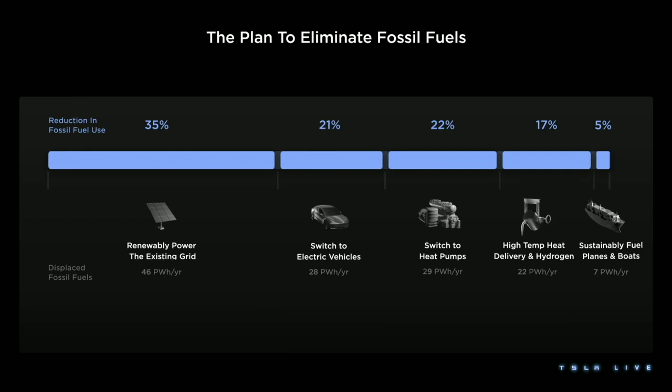Yeah, my personal opinion is that as we improve the energy density of batteries, you'll see all transportation go fully electric, with the exception of rockets. That's awkward. But you can make the fuel with CO2 and water. So you can make methane with CO2 and water, and in fact, you can do that with just electricity. Yes, exactly. In fact, on Mars, if we hopefully get there at some point, the atmosphere is CO2, and there's water ice throughout Mars. So you can take the CO2 and H2O and turn that into CH4, which is methane, and oxygen. So ultimately, even rockets can be electrified.

So first, repowering the existing grid with renewables. And this is going to be a consistent theme. You'll see our estimates for the number of terawatt hours, terawatts, and trillions of investment at the bottom of the page. This is already actively occurring in front of us. 60% of the generation added to the US grid was solar in 2022. And actually, on a year-on-year basis, solar deployment is growing 50% year-on-year.

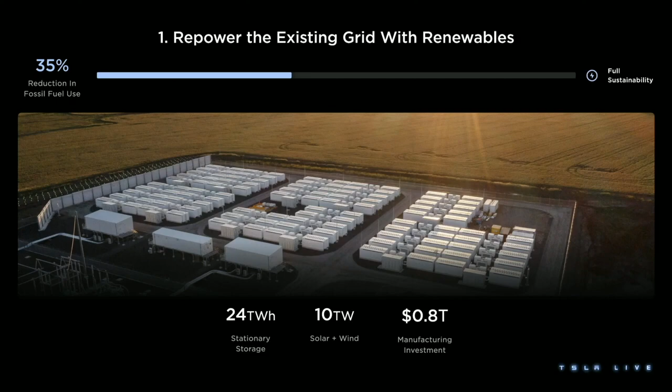Second, switching to electric vehicles. Again, 21% reduction in fossil fuel use by doing this alone. Obviously, Tesla is heavily engaged in this activity, along with many others. Overall, EV production grew 59% year-on-year in 2022, and EVs hit an amazing 10% market share. I mean, it's an awesome milestone. I'm super excited to see that. And you can see the sort of breakdown of the fleet by millions of vehicles. Our goal is to do 20 million electric vehicles a year.

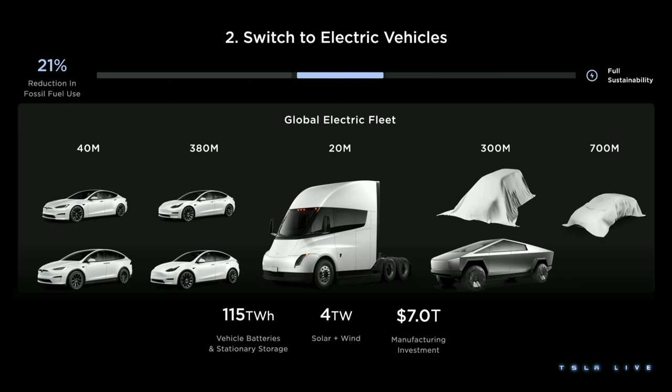Yeah. And one of the reasons why EVs are so enabling is this end-use efficiency point. Tesla Model 3, it's 4 times more efficient from the well to wheel than a Toyota Corolla. And that's all about the efficiency of getting the electricity into the car in a sustainable energy economy, and then how efficient the car is in transferring that stored energy to motion on the road.

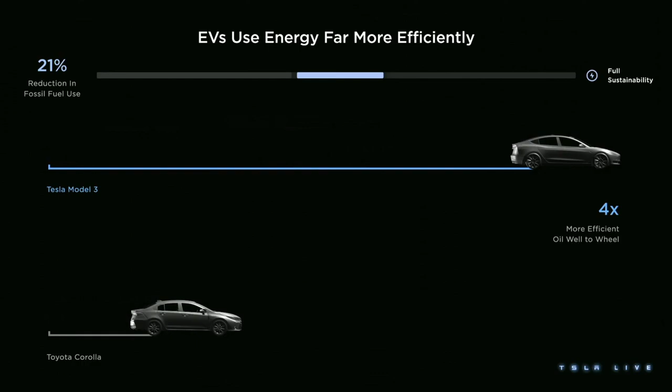Switching to heat pumps in homes, businesses, and industry. Right now heat pumps meet 10% of building heating needs. Install rates growing 10% year on year. It really needs to accelerate.

Heat pumps can serve heat applications up to 200 C in businesses and industry. And from an investment perspective, as you can see on this page, this is actually the lowest hanging fruit in terms of displacing fossil fuels. You might be saying, well, what exactly is a heat pump? So

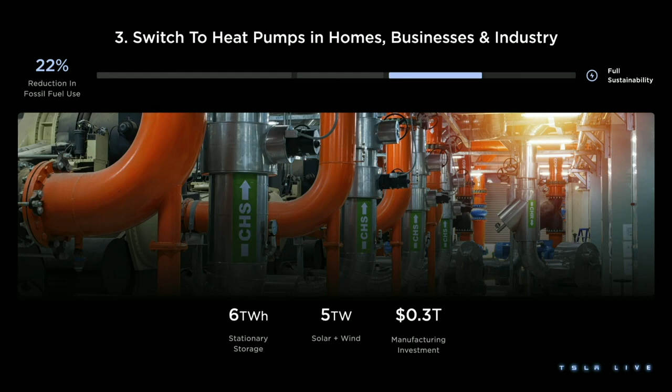heat pumps don't create heat, they move heat. When you think about the natural gas furnace in your house, it is generating heat itself, but what the heat pump is doing is actually moving heat from outside of your house into your house. They're just an air conditioner or a refrigerator in reverse.

So we're surrounded by heat pumps. They're all over this factory. They're in your house. And all this really is about bringing them to displace all the fossil fuel heating in all of the homes, business, and industry.

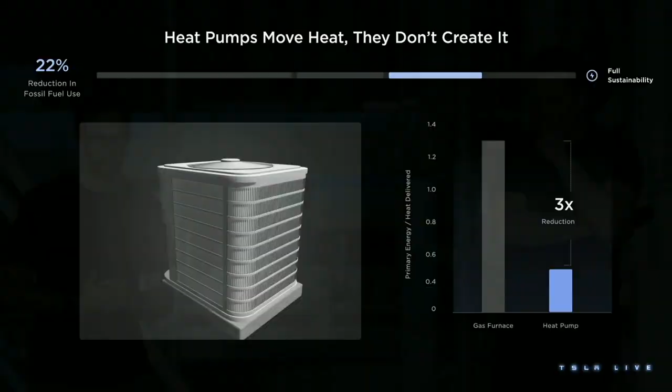Next, a little bit more detail on electrifying high-temp industrial chemical processes. So over 50% of industrial heat is greater than 400 C. Cement, steel, fertilizers, chemicals, plastics, metals refining all need like 1500 C. So we need a solution here. Ultimately, it's purpose-built equipment that enables electrification. Carbon graphite is stable up to 2800 C. There's other options in the 1500 C range, like silicon carbide, other materials.

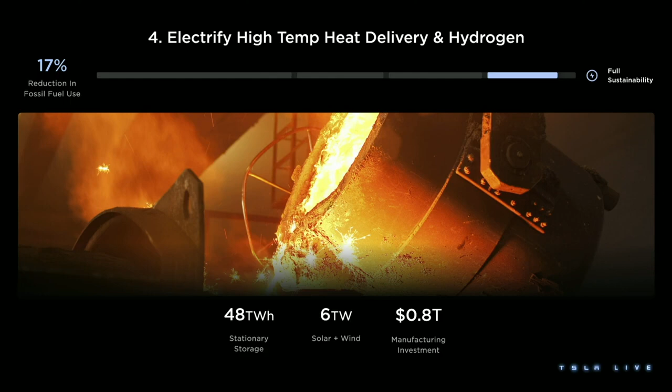So the idea here is you create and store heat when renewable power is available. If this is a sustainable energy economy, renewable energy is intermittent. Peak of the day, you've got more generation than you need. You make a bunch of heat then, and then you transfer that heat into the industrial process 24 hours a day using the stored heat you created when the sun was shining or the wind was blowing.

That's the concept here. And then on the hydrogen side, we also need green hydrogen to decarbonize metals and chemical refining processes. This is things like ammonia, making steel. There's roughly 120 million tons of hydrogen sourced from fossil fuel today to do these things. And hydrogen can also directly replace coal, which is currently used in a ton of steel production, through a process called directly reducing iron. You can replace blast furnaces with a hydrogen-reducing direct reduced iron furnace. And this is the way to eliminate fossil fuels from these aspects of the economy.

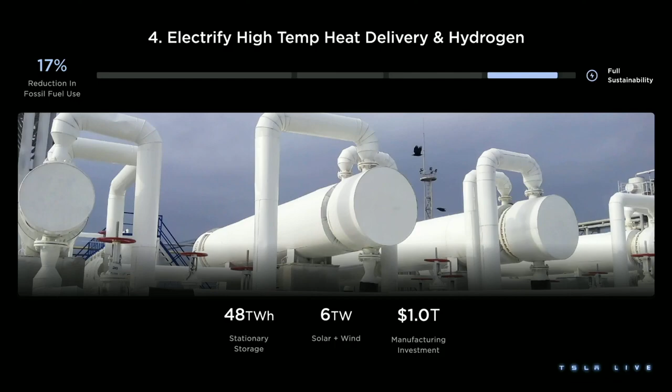A small part of the pie, but a necessary part of the pie, is sustainably fueling planes and boats. Shipping accounts for 3% of global CO2. It's ripe for electrification. Even with lithium iron phosphate, long-haul ships can be fully battery-powered. So that's a great opportunity to electrify. Energy density is a little bit harder for planes, but short-haul is doable today. With some improvements, we'll get long-haul underway. But even in the meantime, we can leverage sustainable aviation fuels produced and stored using excess renewable electricity. There's a lot of work going on in this space.

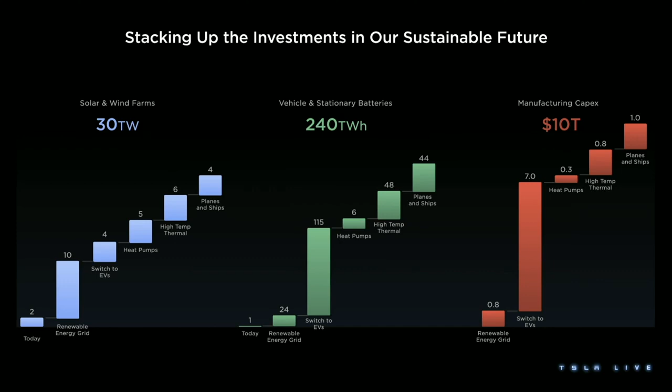So when we stack up all of these efforts, we end up with the numbers we shared at the beginning of the presentation: 30 terawatts, 240 terawatt hours, $10 trillion. And you may be saying, I need some context. Is this feasible? Spoiler alert, it's entirely feasible. Just looking at it from a growth rate perspective, how much do we need to grow the deployment of these technologies? We're talking about only a 3x growth rate in solar and wind deployment. Solar is already growing at a breakneck pace, as is wind. This gap is going to be closed really quickly.

When we look at the electric vehicles, they have to grow 11x. Well, they grew 60% year on year last year. That gap is going to close pretty quickly as well. And lastly, storage. Tesla's energy storage business has grown at 65% CAGR since 2016. The global energy storage business is accelerating pace as well. I mean, all these gaps are going to close, especially as this momentum of the transition to sustainable energy accelerates.

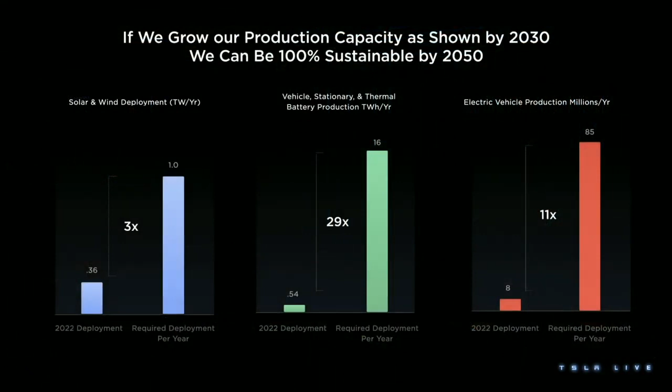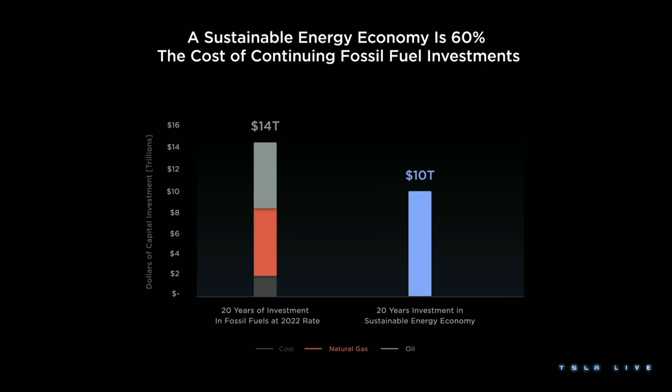And then, what about this investment? How do I have a reference point on this investment? Elon mentioned it's 10% of one year's world GDP. Another way of thinking about it is how does it compare to what we invested last year in the fossil fuel infrastructure? And it's 60% of that investment. So actually, building this sustainable energy economy is less than extending the fossil fuel economy on a year-over-year investment basis. So very doable.

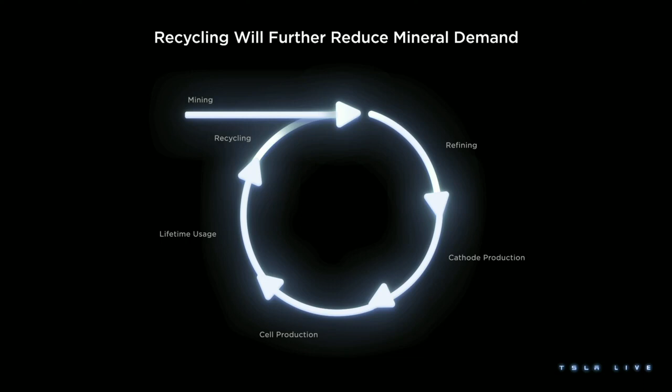We're doing this to build this sustainable energy economy, but the maintenance amount of ore that we require is really an order of magnitude or more less, because of recycling.

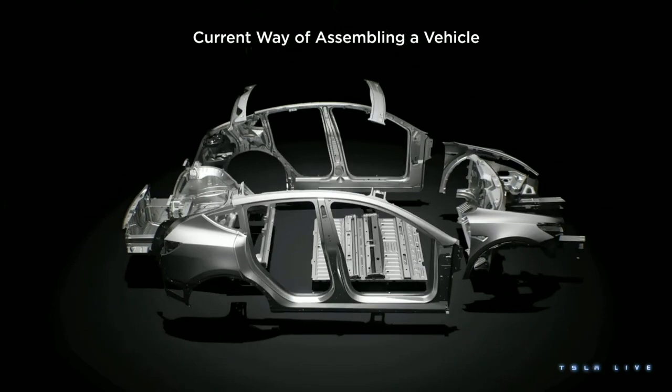You take all these stamp panels, you put them together, then you put them in a framing station, you build a body that looks something like a car, you put the doors on, and then you paint them. Once you get the color, you take the doors off, and then you start putting the interior inside the car. It comes in through the openings that already exist.

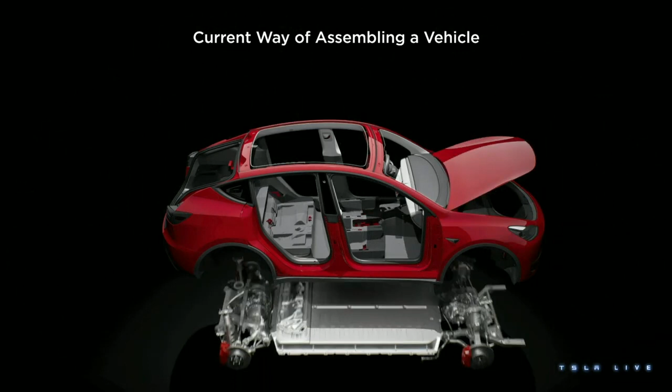I wish it went in like this big piece like this, but there's actually people coming in and out of the car. There's awkward movements. Then we lift the car up. We put stuff from underneath it. We put it down. Then we put the seats in the car. And finally, we close it all out with glass, and we bring those doors that went away for a trip, and we put them back in the car.

Most of the time, we're doing this with a big, giant car and moving it and doing really nothing to it at all. As part of the master plan, we have to make another step change in cost. We started this on Model Y when we made these huge gigacastings, and we deleted hundreds of parts. We simplified assembly with the Model Y structural battery, where we decided the floor should be a part of the car. The battery is the floor.

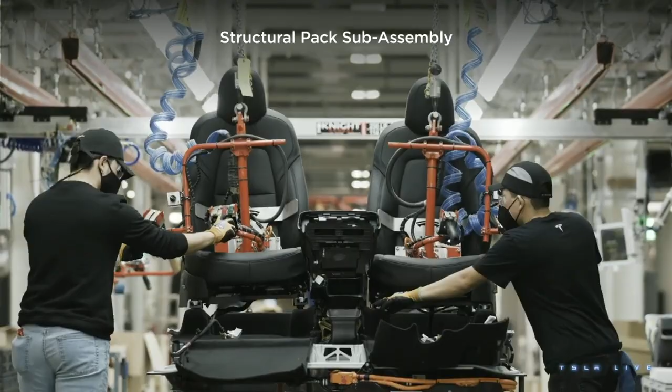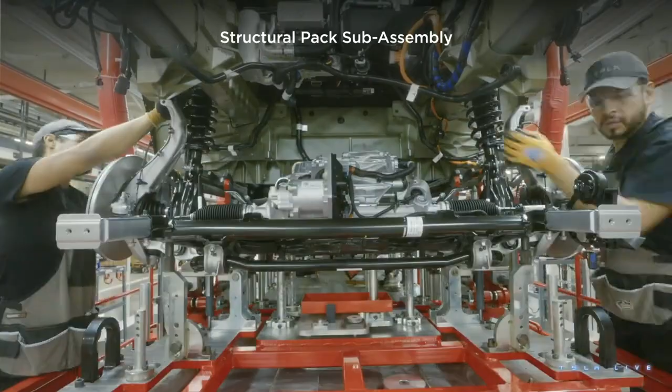We put the seats and the interior on the battery, and we bring it up through a big open hole, and we assemble it. And this allowed us to do things in parallel, fully rethinking the process and reducing the final assembly line by about 10%. And we thought maybe we could do this other places. Yeah, I mean, in a way, the constraints become part of the solution rather than a problem.

So when you think about what I'm trying to say, I really want to hammer this home. When you have a car that's about 5 meters long, and you have people working around it like we did in Model 3, and we change that to this process where we take different parts of the car, and we can do more at the same time, like we did with the Model Y structural battery pack.

What you see here is us doing that on the front part of the vehicle, or the rear part of the vehicle. That means we can get more people working on the car, or robots, working on it at the same time. That means we have better operator density, less time doing nothing. I call that space-time efficiency.

It has nothing to do with quantum mechanics. We can have that conversation later.

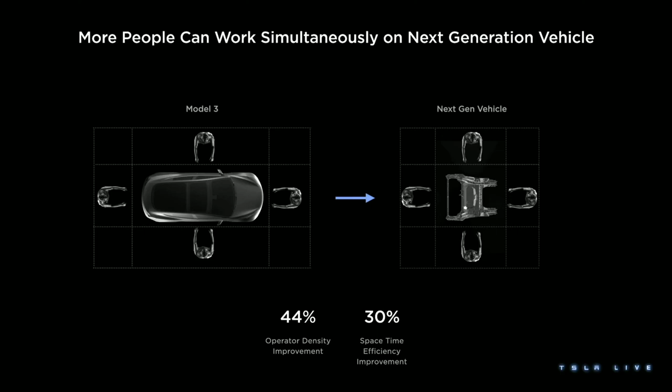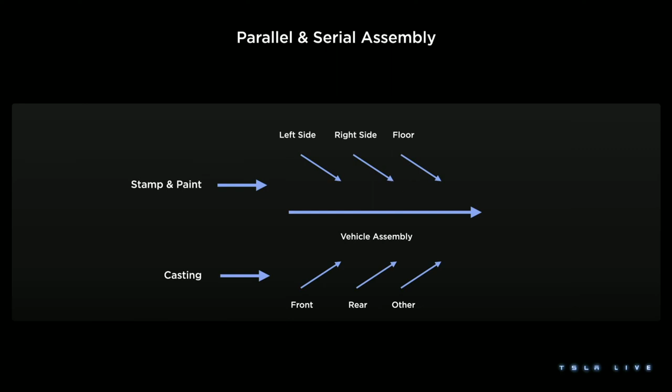In the end, that will probably look something like this, where we balance parallel and series manufacturing in a way where we only do things that are necessary, with a much shorter final line, blocking a lot less of the entire rest of the factory, so we can optimize material flow using the best practices.

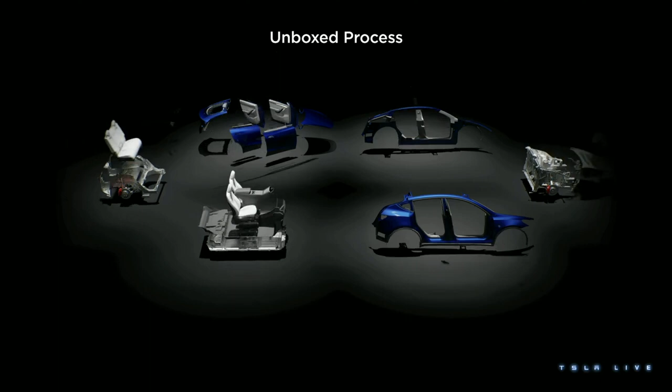And what that means, it's going to look something like this, where we build all the sides of the cars independently, we only paint what we need to, and then we assemble the parts of the car once and only once. We put them where they need to go. The interior is attached from a bottom-up or a top-down strategy, so there's more access for those robots and people. We aren't moving heavy objects around and doing nothing to it. And it means we're doing more work on the car more of the time.

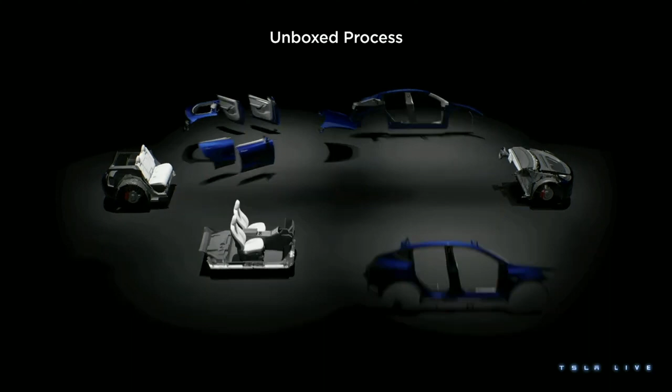And then when we take all of these tested sub-assemblies and we put them together, we finally assemble the car only one time, putting the sides on with all of their parts to a front and rear that was already assembled, carrying the floor in with the seats, and finally boxing it out with the doors one time, just like Cybertruck.

So in the end, you get the same car, but it's not going to be a Model Y. Yeah, this is not. This is a Model Y for illustration, not the next-gen vehicle.

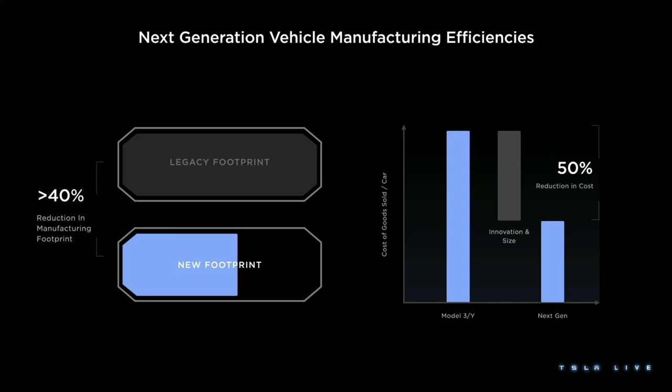To increase the scale and adoption of electric vehicles on the orders of magnitude that we just showed you, we have to make constraints part of the solution. It leads us to greater than 40% reduction in footprint, which means we can build factories faster, with less CapEx and more output per unit.

Thank you, Franz. My name is Colin Campbell, and I have the real privilege of leading powertrain engineering here at Tesla. And the other thing that you probably all know about our powertrains is that they're efficient. Our cars go 25 to 30% further than other EVs in our class for the same amount of energy. But at Tesla, efficiency means more than just reducing how much energy the cars use. It's about how we develop, how we manufacture, how we refine, and how we scale the powertrain.

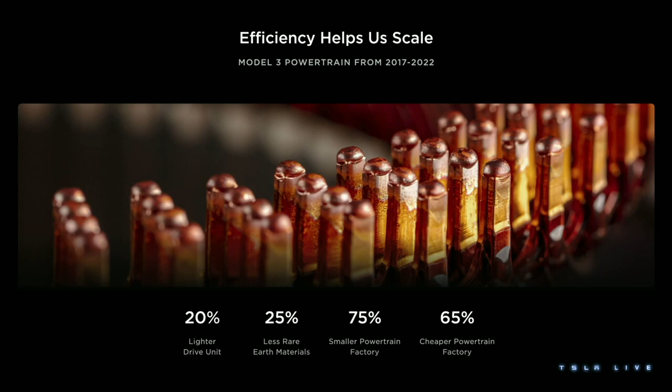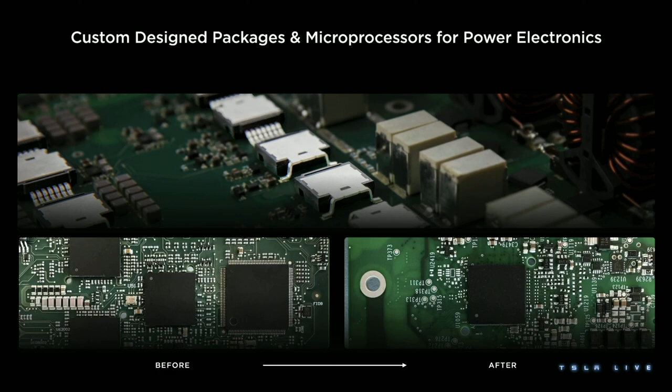And so what does that mean? It means that the silicon carbide wafer that's inside those packages can be much smaller. Silicon carbide is an amazing semiconductor, but it's also expensive, and it's really hard to scale. So using less of it is a big win for us.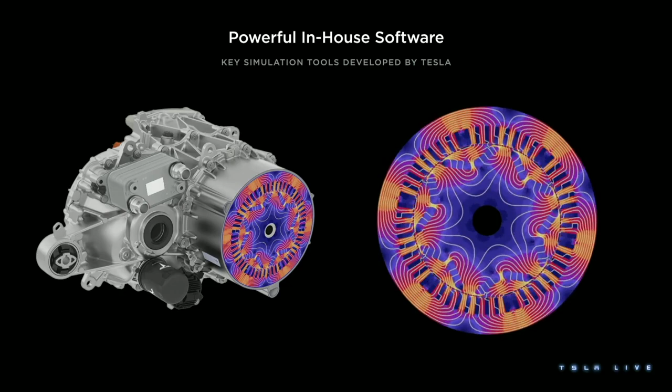Now, you can buy software that will do all of this, but our tools are faster, and they're more accurate, and that was not easy to do. That allows us to quickly iterate through millions of possible drive unit designs to find the best one.

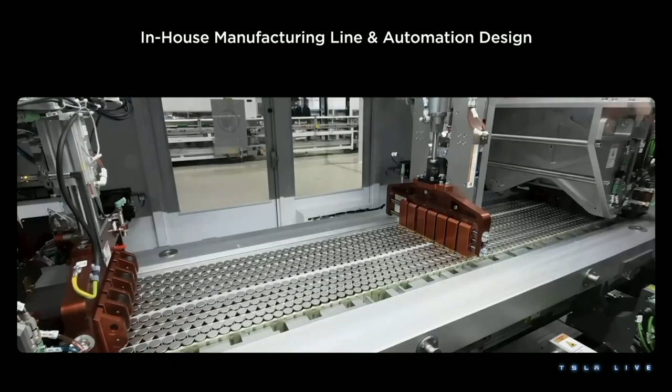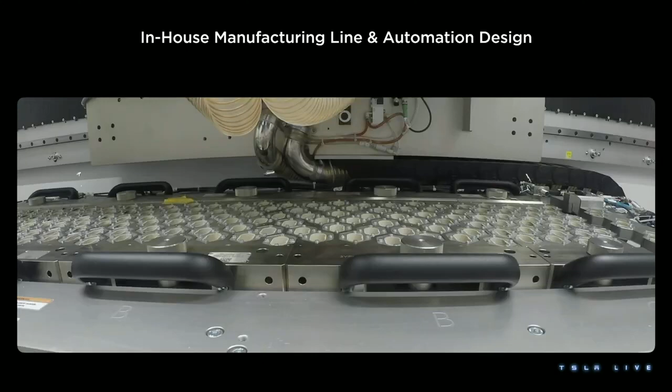So at Tesla, our powertrain and our powertrain manufacturing equipment are both designed under one roof. The engineers who are designing the motor are in the same room as the engineers who are designing the machine that's going to put that motor together. That collaboration pushes us from day one to design products that are not only high performance, but are really easy to assemble. Those silicon carbide transistors that I mentioned, a key component but expensive, we figured out a way to use 75% less without compromising the performance or the efficiency of the car.

And of course, we know that battery cell supply is one of the constraints on the scalability of EVs right now. Our new powertrain is compatible with any battery chemistry, and that will give us great flexibility in battery sourcing. If we want to make EVs more accessible to people, they have to be cheaper. We've reduced the drive unit cost to about $1,000, and we don't think any other automaker is even close to that number.

Finally, the bigger a factory is, the longer it takes to build. If we can build the same number of cars from a smaller factory, we are going to be able to scale EV production faster. Our next powertrain factory is 50% smaller than the one that's behind me today, even though it has the same capacity.

So I talked about how we had reduced the amount of rare earth in our powertrains. As the world transitions to clean energy, the demand for rare earth is increasing dramatically. Not only is it going to be hard to meet that demand, but mining that rare earth has environmental and health risks. So we want to do even better than this. We have designed our next drive unit, which uses a permanent magnet motor, to not use any rare earth materials at all. Thanks, Colin.

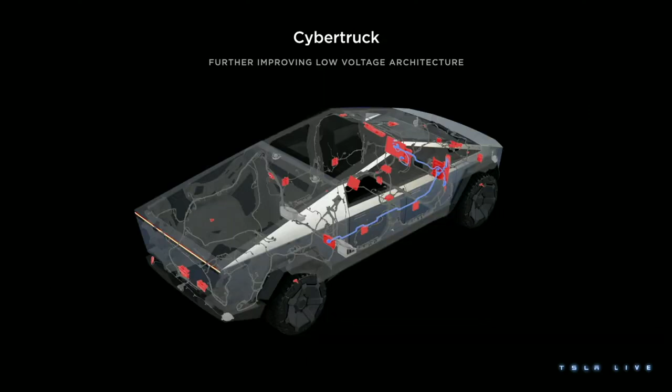That allows for smaller wires, smaller e-fuses, and smaller controllers. It also allows us to make those heat sinks smaller, or in many cases, remove them completely, all benefiting the car in terms of mass and cost. 48 volts is the future for low voltage design at Tesla, and likely the rest of the industry in due course. We welcome and encourage other OEMs and the entire supplier network to join us on this evolution.

You bet. For the next-gen platform, we're looking to optimize the controller design across the entire car and across all of the organizations, not just for a given subsystem. Simplifying the wire harness will enable automation. 48 volts will allow us to reduce the size, mass, and cost of the low-voltage system, and it's one of the key things to enabling us to scale production of the low-voltage systems for the Master Plan 3.

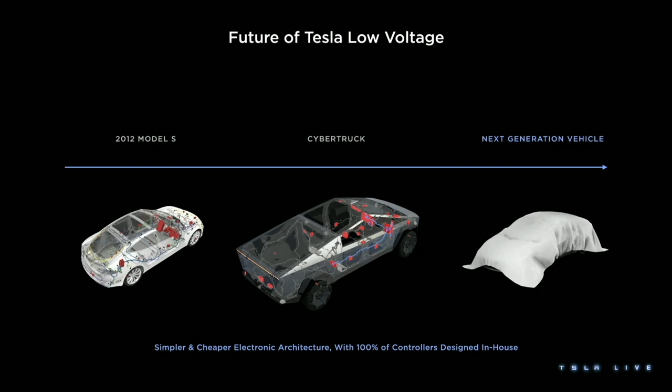So I joined Tesla in 2012, and even in those very early days of the Model S, we already had the ability to update software over the air in all of the controllers throughout the entire vehicle, at a time when other cars were just starting to update software in only their infotainment units.

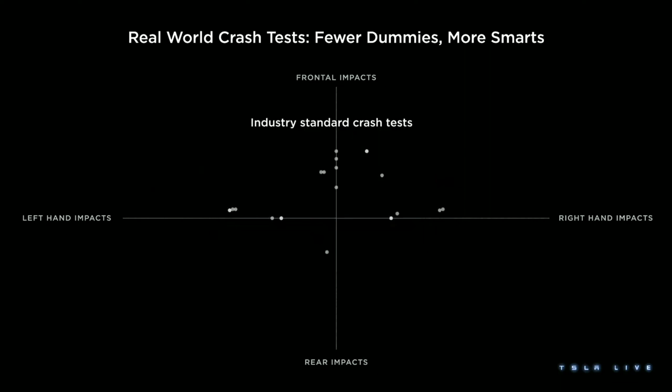We are able to use our collision data to design our crash safety systems for what happens in the real world, far beyond what regulatory and consumer ratings tests prescribe. And then furthermore, we're able to use that data to recreate in simulation all of those crashes every single time we make a change to the vehicle's design, or to the software that controls the airbags and other restraint systems.

Here on this graph, the gray dots that show up first are specific crash tests that are prescribed by regulatory and consumer ratings agencies throughout the whole world. And the rest of the color that fills in around and on top of it, those represent the crashes that we've seen happen in the real world. Those are what we design for and what we test to. Right. And last year, this data was used to change the algorithm for seatbelt tensioning to reduce injuries in the field, which was OTA to all of our cars.

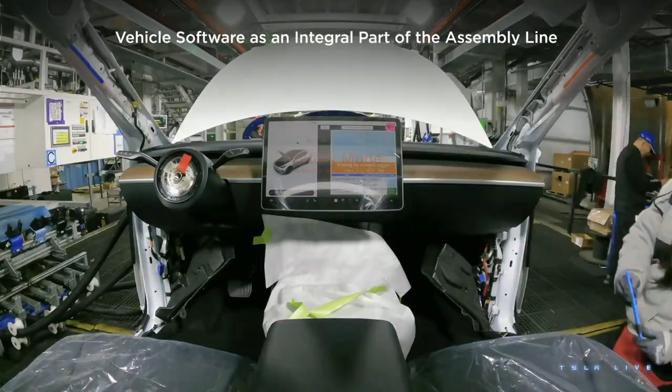So far, you've heard me talk a lot about how we leverage our software systems to iterate quickly on the customer-facing product. But what I haven't talked about, and what we haven't said much about publicly in general, is how we leverage these capabilities in our own internal operations.

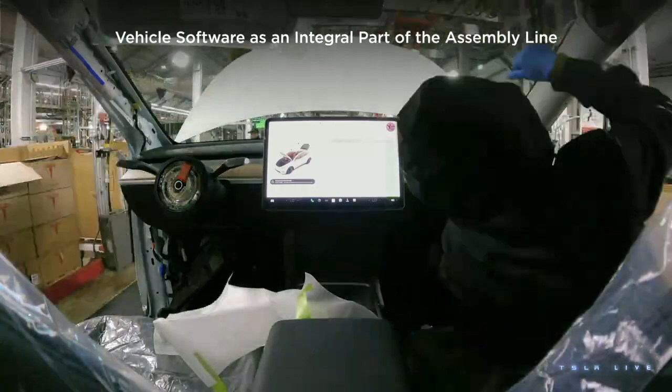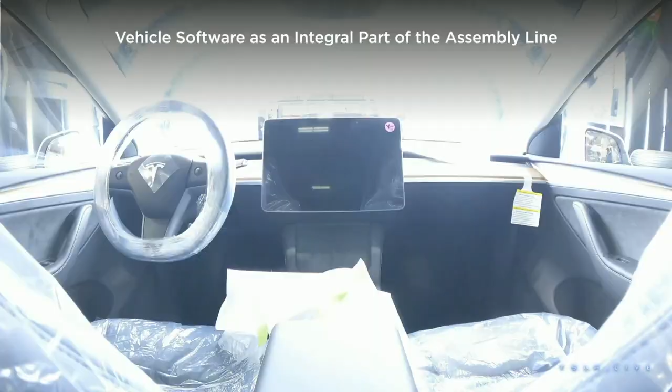So for example, in the early days of manufacturing Model S, we very quickly realized that there are a lot of different ways you could misassemble a car. You could forget to plug in a wire, you could not fully seat a connector, you could pull a part from the wrong bin. So when we designed our manufacturing processes for Model 3 and all of our other vehicles going forward, we took a page from the software playbook, which says, test early and test often. And we applied that mantra to every single car that we build at every step of the assembly line.

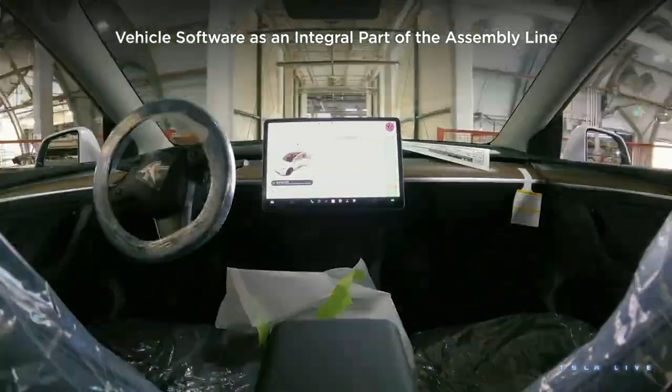So now, when a production associate plugs something into the car, the central car computer sees that connection, confirms that it's the correct part for the type of car that's supposed to be built, installs a software update if necessary, checks configurations and calibrations, and runs a barrage of tests on that thing and all the other things that are connected to it.

And if it finds an anomaly that can't be fixed purely with software, it throws an alert immediately that is displayed prominently on the vehicle's display, as well as sent to back-end command and control systems, so that a human can come over and fix the problem before the rest of the car gets built on top of it. So that's a bit of a preview of all the pieces that we're building, looking ahead to our future of autonomous fleets. Synchronization, permissions management, security, and privacy.

And that has been a whirlwind tour through some of the things that we're doing behind the scenes to enable the efficiency, cost reduction, and speed that we are going to need for our next phase of growth and for the next phase of the master plan. And so now, to tell us about the latest in full self-driving, I'd like to introduce Ashok.

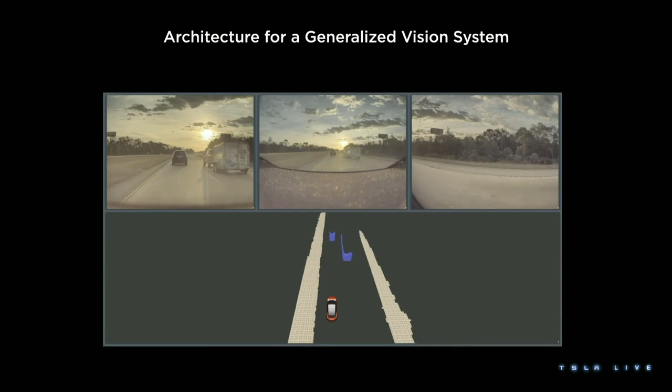Thanks, David and Pete. At Tesla, we are betting on AI, machine learning neural networks to help us build a general vision and planning system. So we don't stop at the computer vision techniques, but we reach out to techniques in other areas, such as language modeling, reinforcement learning, to model this task. These networks use similar techniques, such as transformers, attention modules, autoregressive modeling of tokens, similar to what large language models like ChatGPT do out there.

With such an end-to-end system of solving perception, we have really removed the brittle post-processing steps and produce high-quality outputs for the planning system. This is, for example, an intersection where we have to turn left while yielding to crossing objects and to the pedestrians crossing the road. We have to do this both safely and smoothly while respecting everyone's right of way and preferences.

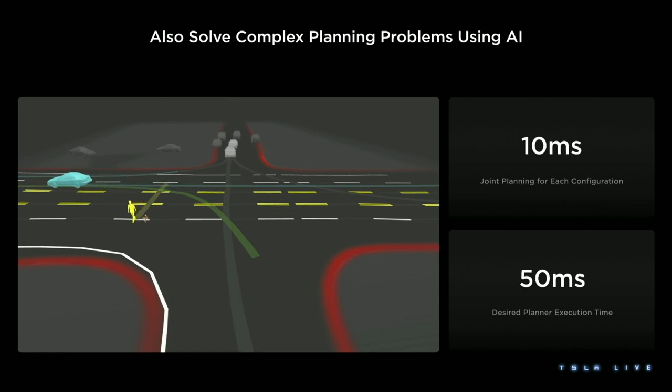If this was done naively, each configuration would take 10 milliseconds of compute, and there are easily thousands of configurations to reason about. This would not be feasible using traditional compute. But using AI, we have packaged all of this into a 50 millisecond compute budget so it can run in real time. The second big piece of this puzzle is the data. This is where Tesla has a unique advantage because it can tap into the fleet to access the exact data that can fix the problems.

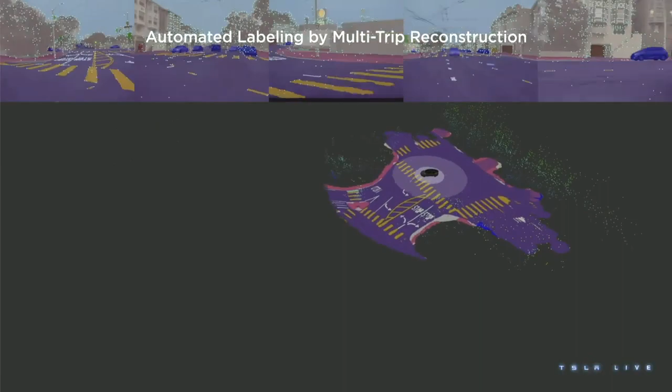But raw data is not sufficient. In order to train these networks, you need labeled data. You need labels to supervise the networks. And if you only depended on the human labelers, this data would be too tiny to train these large multi-camera video models. We need lots and lots of data to train these networks. Hence, we have built a sophisticated auto-labeling pipeline that collects data from the fleet, runs computational algorithms in our data center, and then produces the labels to train these networks.

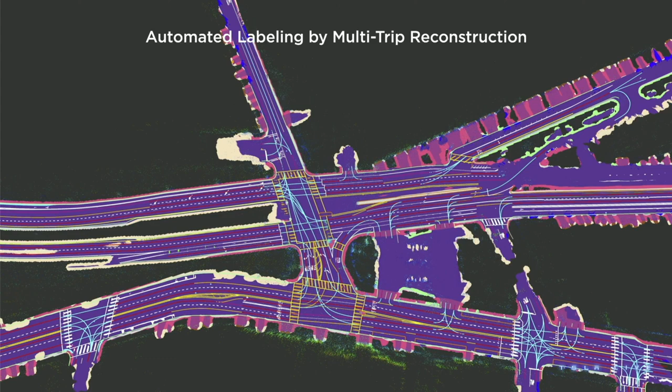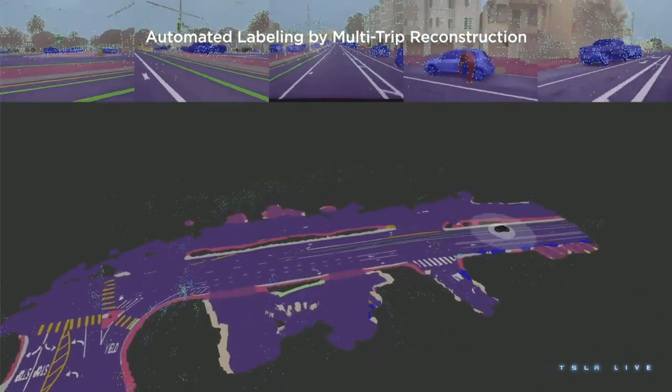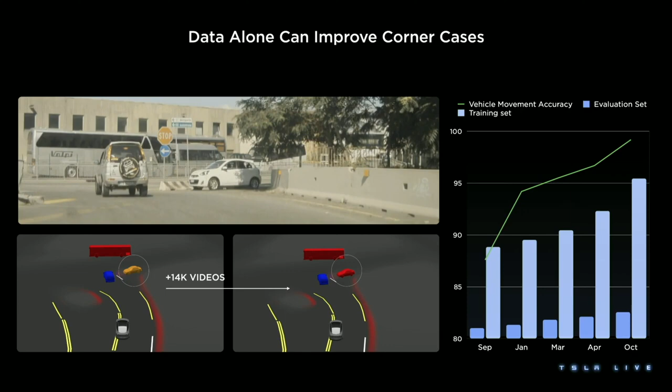Here, you are seeing a 3D reconstruction that is happening by collecting various clips from different cars in the fleet and assembling them all together into a single unified representation of the world around the car. You can see all the lanes, the road boundaries, curb, crosswalks, even the text on the road being accurately reconstructed by these algorithms. On the chart on the right side, you can see that every time we add data, the performance improves. And then we can do this for every kind of task that we have in our system.

And this is what we call the data engine. We identify challenging cases, such as the one you saw earlier, and there could be other different types of challenging cases too. We mine the fleet for such data, put it through our auto-labeling system, and produce the labels, add it to the training set, and once we have the newly trained models, we deploy them to the fleet.

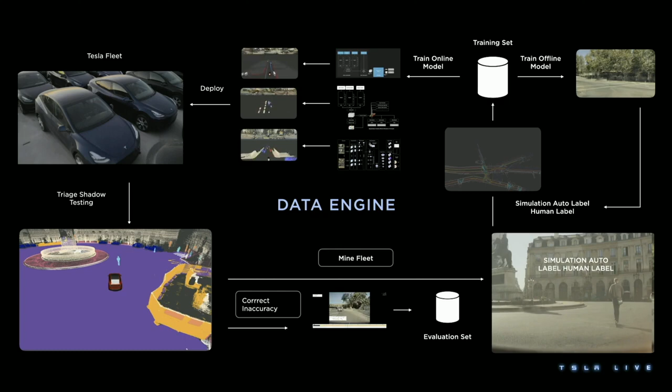We have already shipped our FSD beta software to pretty much everyone that has bought it in the United States and Canada. This amounts to roughly 400,000 customers who can turn it on anywhere, and then the car would attempt to drive to the destination. It's still supervised, but it can already handle turns, stop at traffic lights, yield with other objects, and generally get to the destination. We have observed that people who use FSD are already 5 to 6x safer than the US national average.

Like I mentioned earlier, the solution to scalable FSD is getting the AI architecture, the data, and the compute just right. And we have assembled a world-class team to execute on this. We are pushing the frontier on these three items, and as we improve the safety, the reliability, and the comfort of our system, we can then unlock driverless operations, which then makes the car be used way more than what it is used right now.

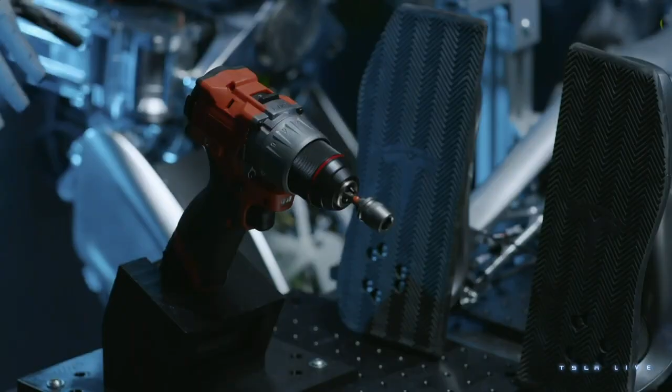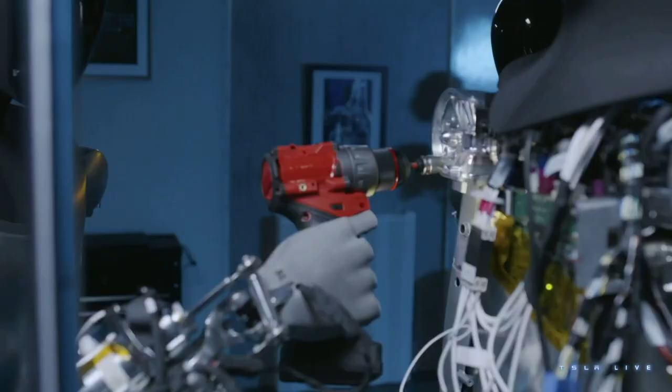It's obviously not doing parkour, but it is walking around. And we have multiple copies, I suppose, of Optimus. The thing that I think Tesla brings to the table that others don't have is that we have the real-world AI. We're the most advanced in real-world AI. So the same AI that drives the car, which you can think of the car really as a robot on wheels, and this is a robot on legs. So as we solve real-world AI, and I don't think there's anyone even close to Tesla on solving real-world AI, that same computer and software goes into Optimus.

It's not even clear what an economy means at that point. Since an economy is output per person times persons, but if output is much higher and there's no limit on persons, then what's the actual limit on the economy? We're still pretty far from Kardashev scales here, but we're getting there. So anyway, it's probably the least understood or appreciated part of what we're doing at Tesla, but will probably be worth significantly more than the car side of things long term.